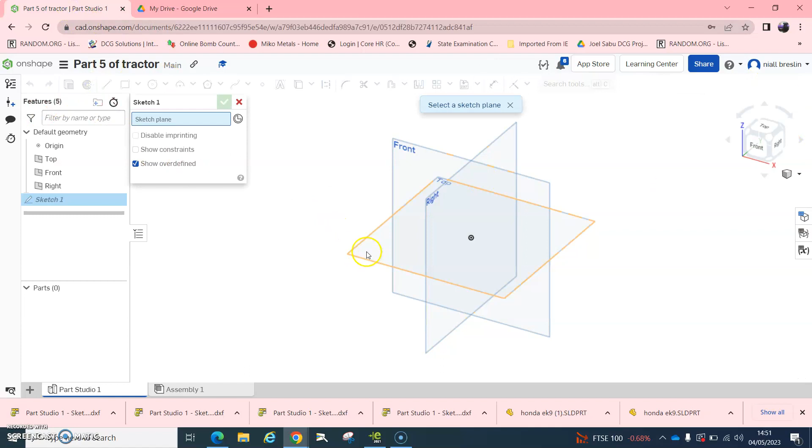In this drawing, we're going to start here with this hole in the very center. So we're going to sketch on the top plane, straight down it, and hit circle. If we look at that circle, it's dimension 6.5, so hit D on your keyboard.

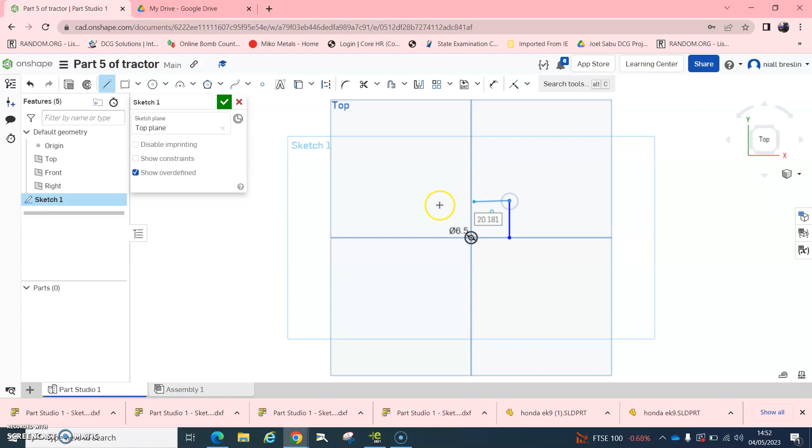Now next we're going to draw this shape here, going around this part of the tractor. So draw a line starting anywhere in the center. See the way the little dashed lines are telling us it's going straight up, and again the dashed line is telling us straight across. So it's going up, over, up, then down, then over and down again.

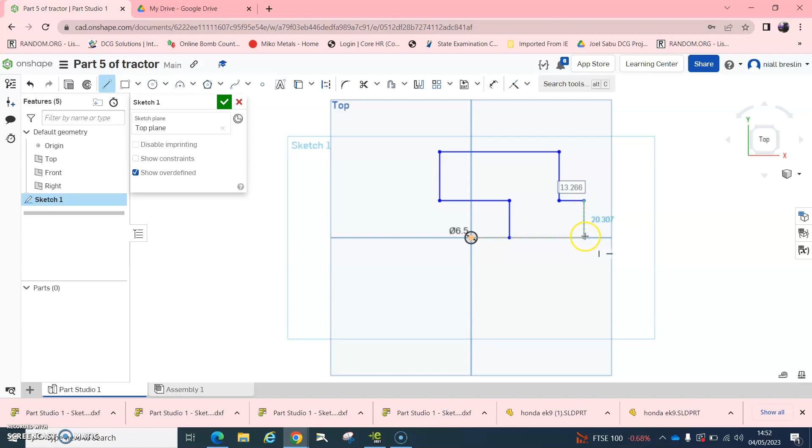Now when all the lines are in blue, it's telling us to hit escape to get rid of the line command. It's telling us that none of these lines are dimensioned, so we need to start looking. The distance from here to here is 6. So D on your keyboard, and we're going to go from here to here, 6.

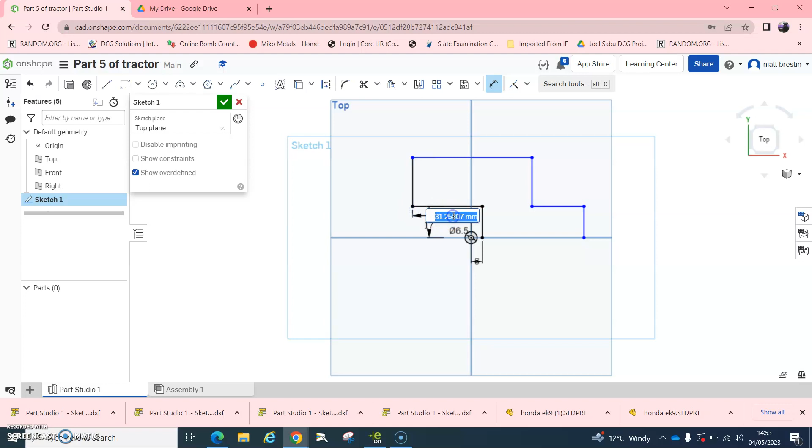The distance from here up to here, 17. And the distance from here to here, 6. Because this total is 12, and this is exactly halfway, then we know from here to here is 47.

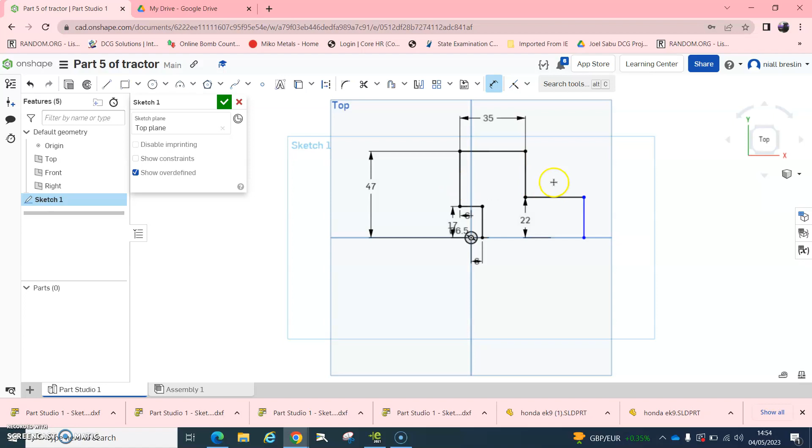You can see the lines now are all starting to turn black for us. This here is 12 and 23, so a total of 35. And from here to here is 22. And this bit here to here is 26.

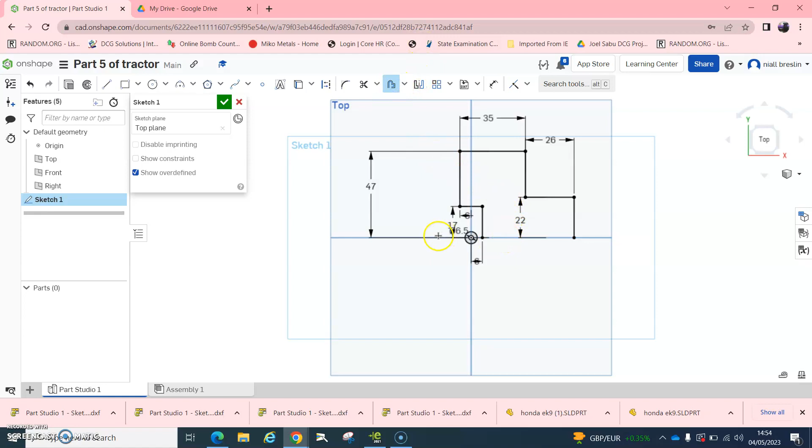That's it all done there now. So then we go mirror. Where do we want to mirror? Around the center line, sorry, mirror around this center line. We want this line, this, and that's that section of the sketch completed.

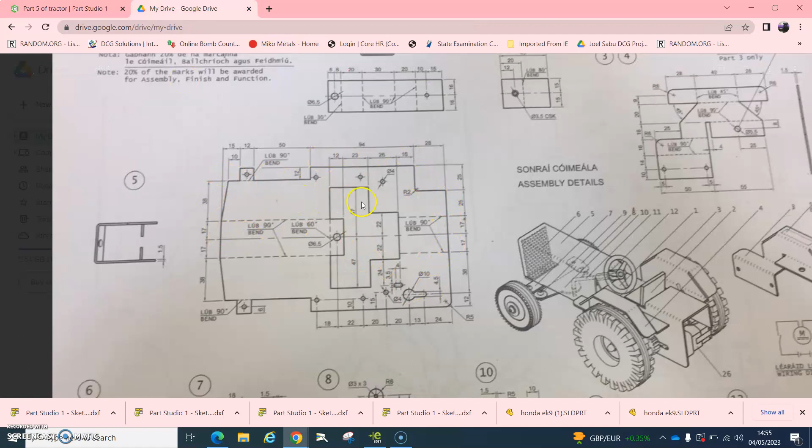So next, what we're going to do is this top part up here, and then we're going to dimension these holes here, and then mirror them around. Now it's not exactly the same down here, so we'll adjust or fix that when we get to that part. So we're going to draw a line. Try to keep everything on the one sketch as well, makes things much easier.

So the distance from here to here is 16 and 28, which is 44. I'm just going to hit dimension here to here, 44. And then we'll continue on.

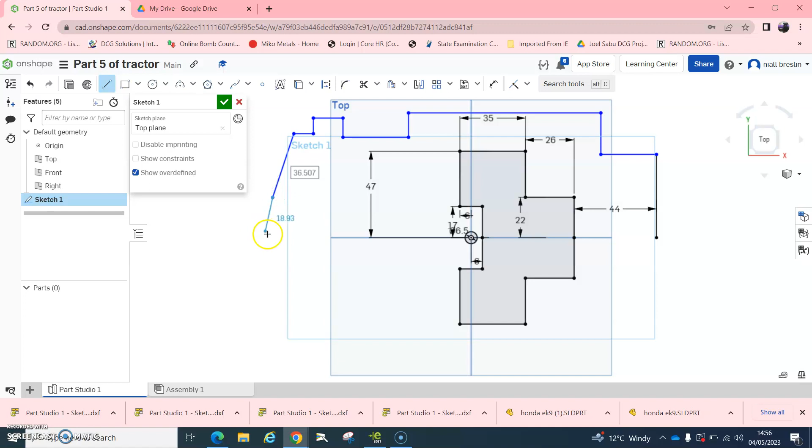This is going to come in here, up here. Dimension from here to here is 44. This back line is here 17 and 25, which is 42.

This here comes back from here. Here to here is 28. And here to here is 25. So the big one here is 94.

Here then it's 12. So here then it's 50 from here to here. This again is 12. This is 12. This is 12. And this little gap in here then is 10. So this little gap here now is 10. And this gap from here to here is 15.

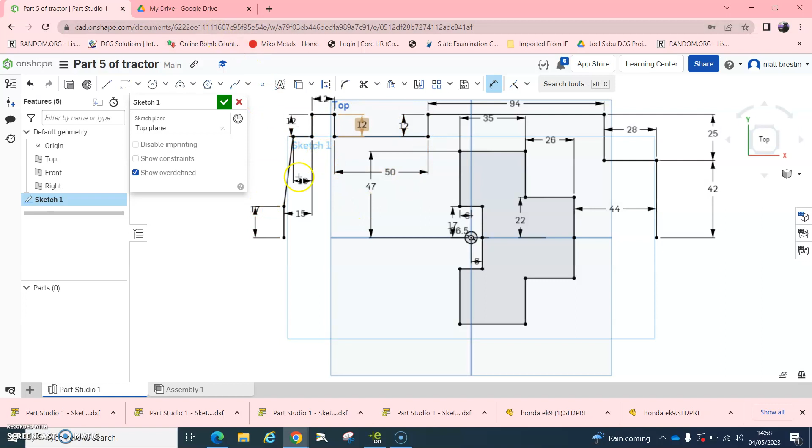Again, we're just going to mirror around this line, this, here, this. And like I said, some of this is going to change. So that's that part completed.

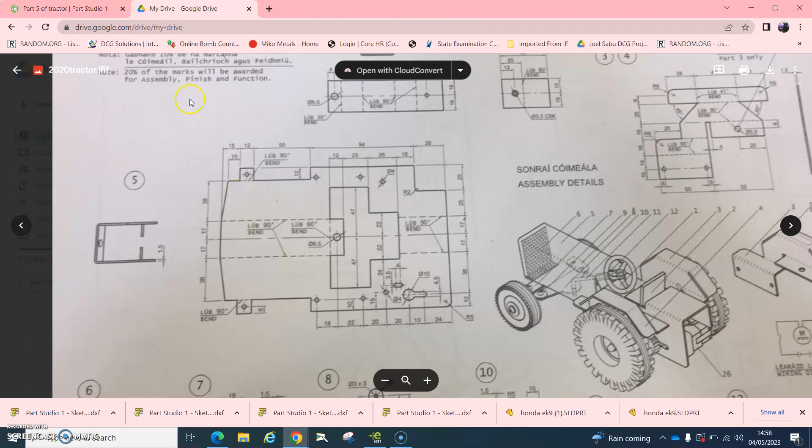So we've just got a few little circles in here. Now it says up here in the drawing, any undimensioned holes are 3.5. So this hole here, there's no dimension for that, so we can presume D, put that there, it's 3.5. And we can tell that from here to here is 6, because it's going to be right in the center, and from here to here is 6 as well, so that's okay like that.

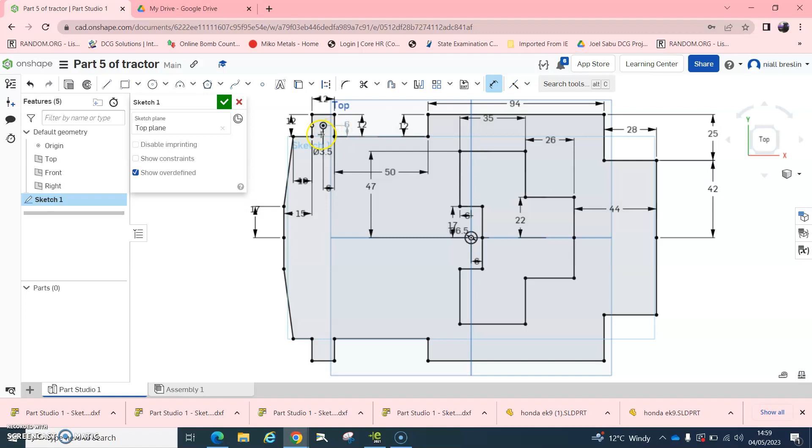Now in order to mark out the center for this line again, when we go to etch this out, the X will be there first to drill that hole, because it won't etch out that hole first.

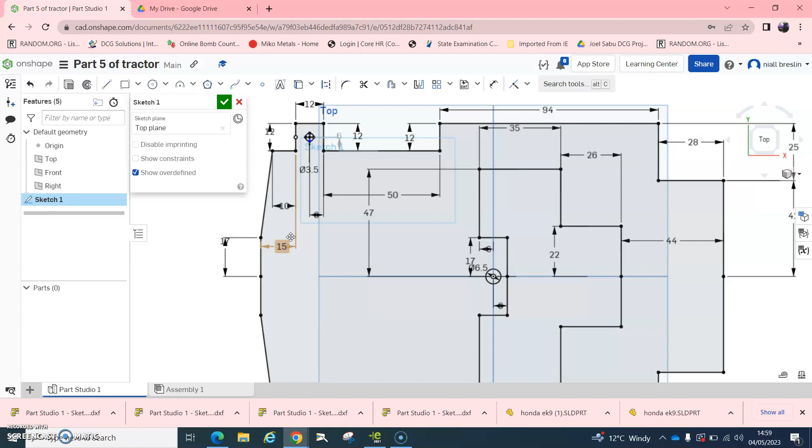Now there's a little fillet in here. Instead of 5, we want to make that just 2.

We've got a hole here, got a hole here, got a hole around here somewhere. You can see those are the 3 holes there, 1, 2, 3. So these 2 here are 3.5.

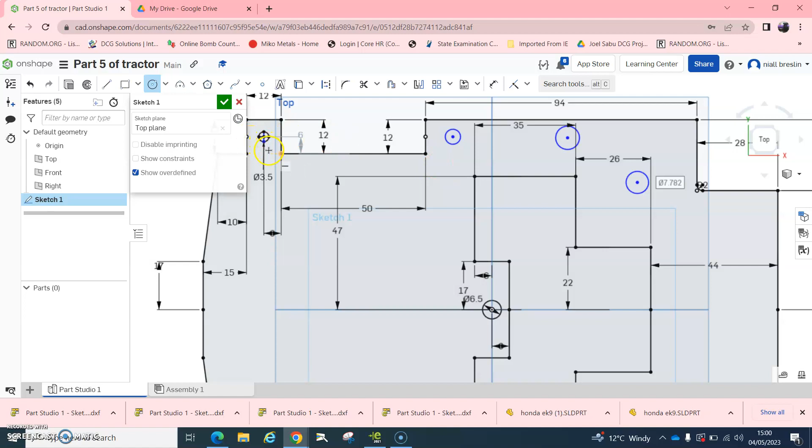So if we actually click, there's a little trick, hit escape there. We click this circle, and this circle, and we make those equal. Because we told that one there is 3.5, then it's going to make those the same. And then for some of the dimensions for these, we've actually got to get it from down here.

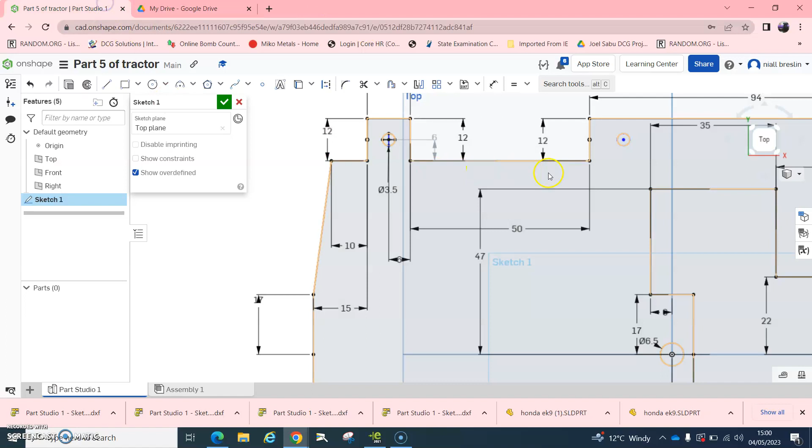So from here to here is 18, and then up 10. So D on our keyboard, here to here is 18, and down 10.

Undo that, what's the problem there? If it was red like that, it's trying to tell you there's some issue. What we might have to do, maybe it's because we made it equal. Right, undo that there. I'm actually going to have to delete this, just delete it.

Now dimension, here to here, 10. Here to here, 15. And this here, 3.5.

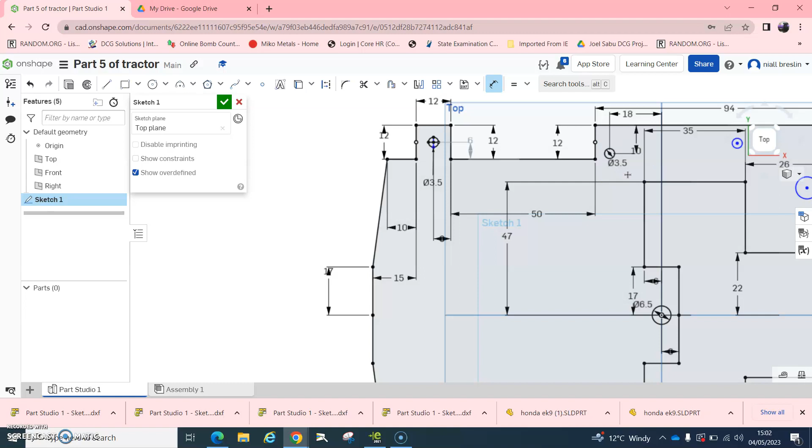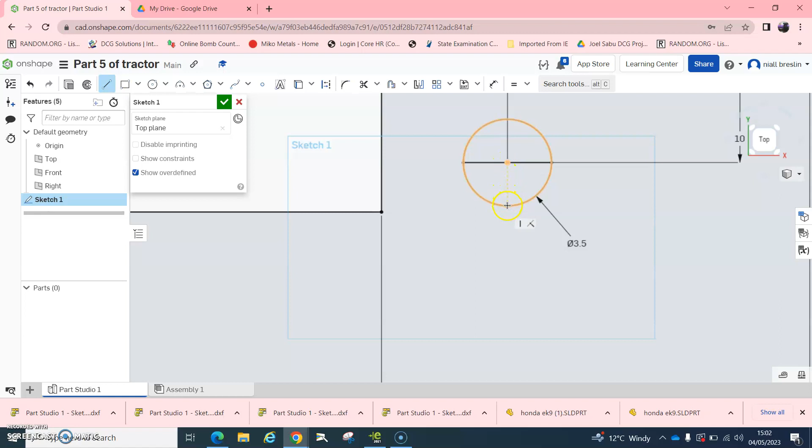Again, we're just going to do a line. Hit escape, hit L, line. We're going to delete this one too. Click on that line there, delete it.

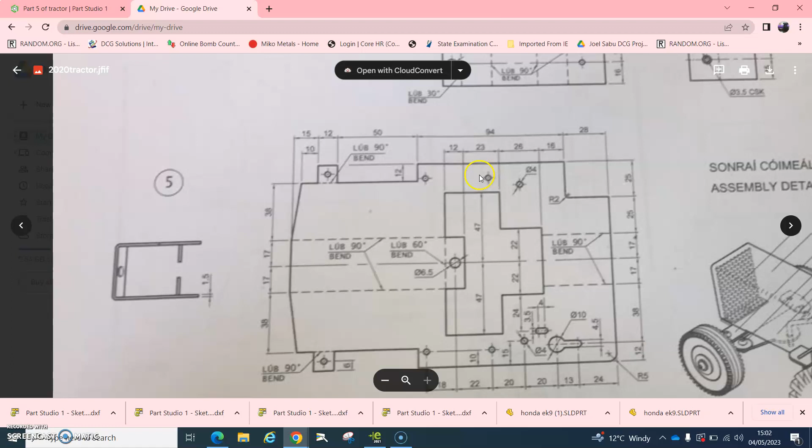Circle. This one is 18 plus 22, 22 from the center there actually. So dimension, D on our keyboard.

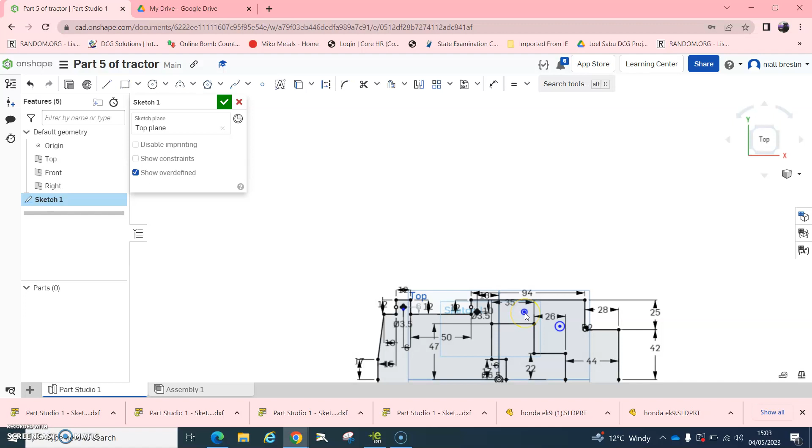From here to here, 35. Just double check that there's 10. Perfect. And we'll check that there's 3.5. So that's that circle around there.

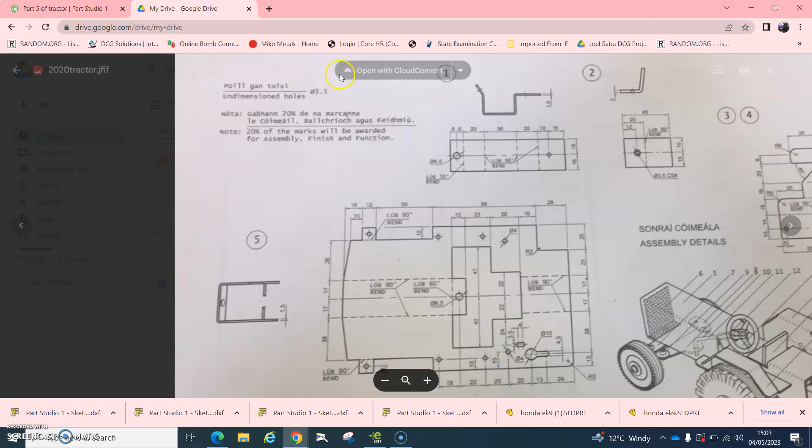Now this circle is over and then from this one here, further 20 and up 15. So from here to here, 20, good, good. Here to here is 15, and this is diameter 4.

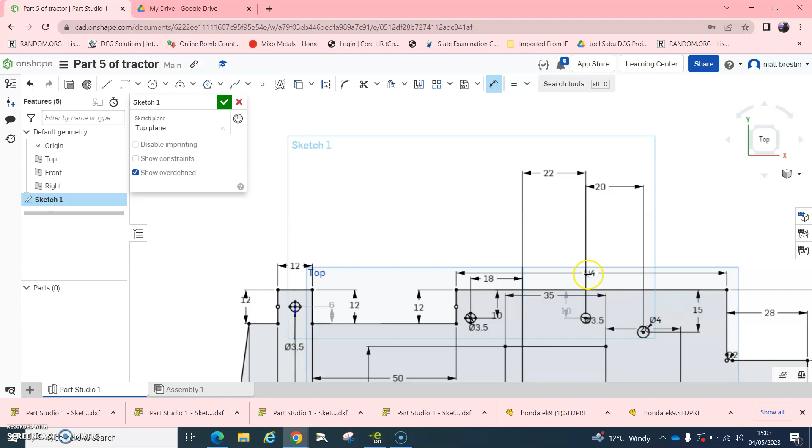Now those three circles can be mirrored down to here. So mirror along the center line, and actually mirror those as well.

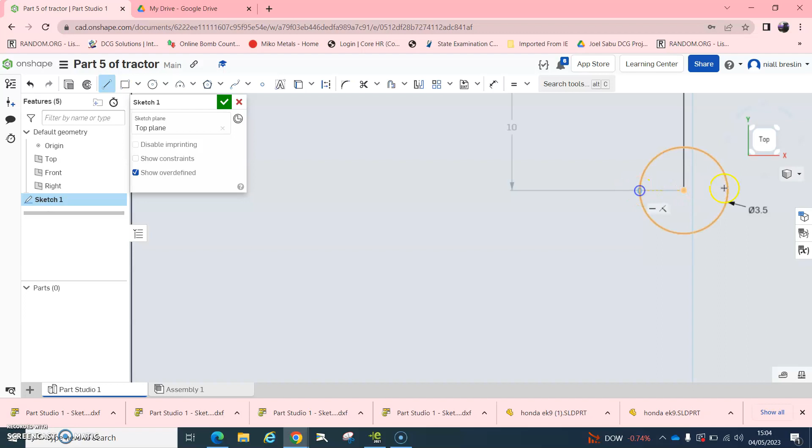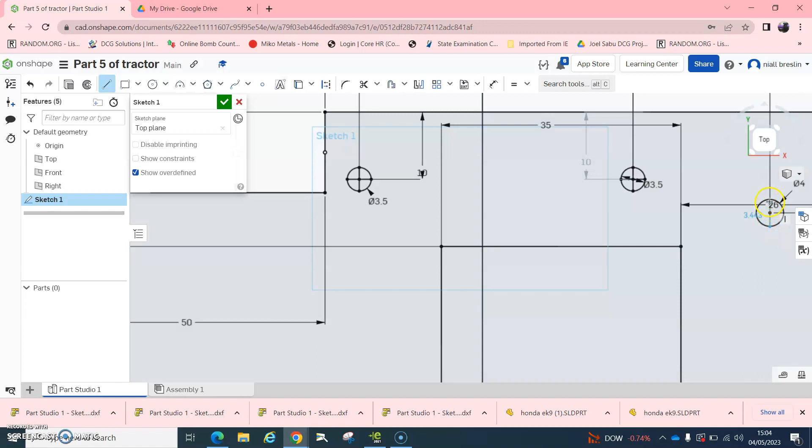This, and line. Escape line. Escape again, and line.

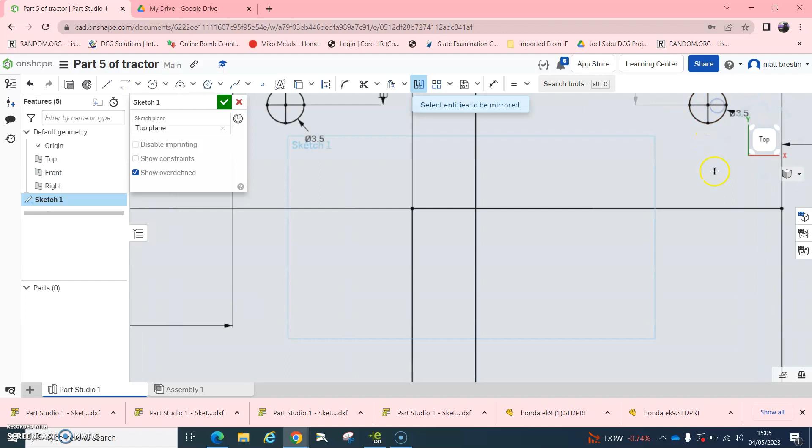We'll mirror those down as well. Skip, so again go back to mirror. Right, this line, and this line, and this line, and this line. Just double check everything's down there now. Yeah, perfect. Right.

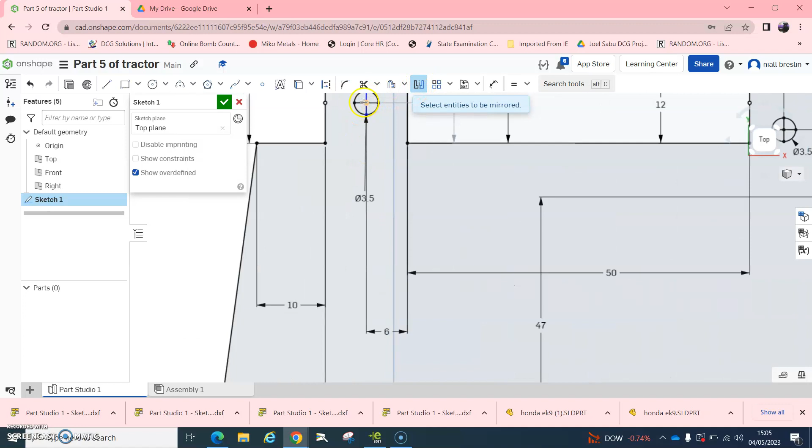Next, oh forgot to bring this fella down here too. So we're going to mirror this, and then this.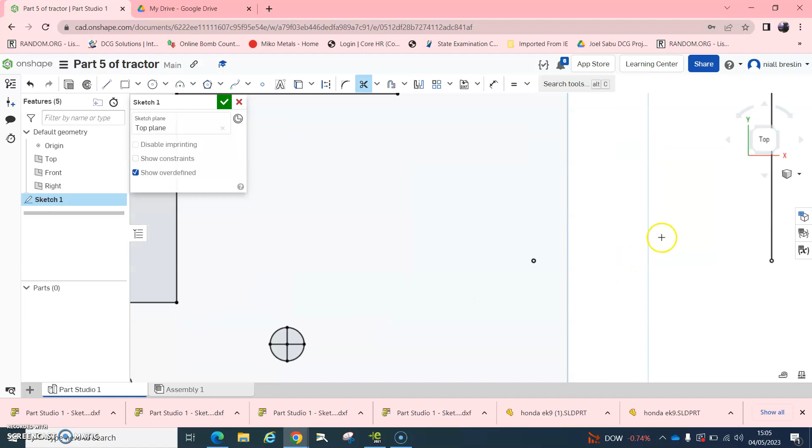Now what we're going to do is get rid of these two lines. So if we hit M, trim, get rid of that, and we're just going to draw a line now from here out. I didn't do that exactly. No, I didn't. Okay, we'll just trim.